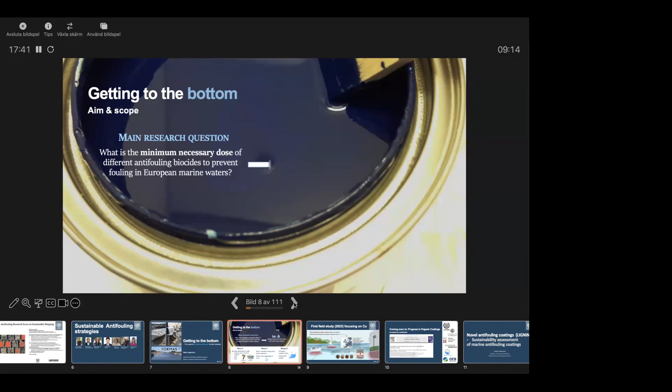I will show you some preliminary results, but her main research question is what is the minimum necessary dose of different antifouling biocides to prevent marine fouling in European waters. The results are relevant both for the shipping and the leisure boat sector.

What she's doing, and what I have also been involved in during the last decade, is detecting different biocides by using X-ray fluorescence techniques. We have a handheld X-ray instrument here at our unit, and Maria is also collaborating with others who use a benchtop instrument instead. Her biocides of interest you see here to the left.

She's running experiments both short-term and long-term, so it could be relevant both for the leisure boat sector and the shipping sector, conducted in European coastal waters. Regarding the results, the minimum effective dose of copper is 7 micrograms per square centimeter in three different locations: Sweden, Denmark, and France. That is very interesting, and she will continue similar work for the other biocides.

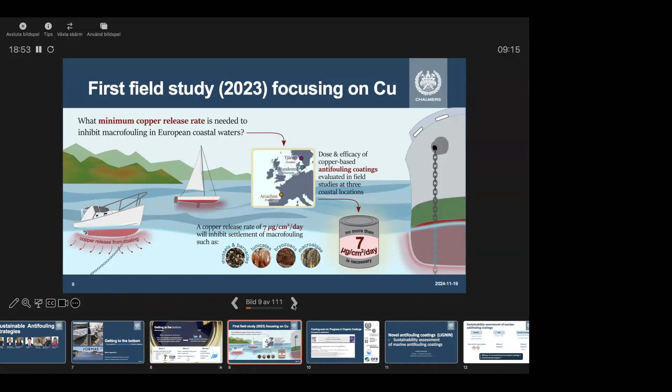This data is just about to be published. It has been accepted for publication, so look out for it in Progress in Organic Coatings if you want to learn more. Okay.

Then we have Emily, Lena, or yeah, okay. Yes. Or shall I? I am here. Yeah. You need to stand here so everybody can see.

This project, in short called Lignin, I will come back to that. Novel antifouling coatings: sustainability assessment of marine antifouling coatings is what the postdoc Emily, who joined us from France in the spring, is mainly working on. The idea is to do a sustainability assessment of marine antifouling coatings, where she compares coatings that contain biocides with FRC, silicone-based foul release coatings, and the novel, innovative coatings.

Bio-inspired coatings, hydrogel and lignin. Lignin is a residual product from the wood industry, so this is a collaboration with Luleå Technical University. The aim is to test the toxicity together with the efficacy, so they hopefully will be both efficient but non-toxic.

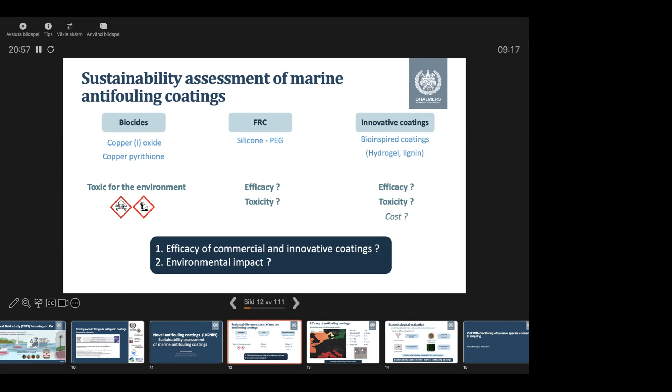I think that's it, if you don't want to add something, Erik. No. No.

She has test areas that include, besides the waters around Sweden, meaning the Baltic Sea and the Skagerrak-Kattegat area, also two stations in the Mediterranean, in Trieste, Italy, and Banyuls, France, with the aim to include different salinities. You can see it's a span from 7 to 38.

There is monthly monitoring where we have photos sent to us of the frames you can see, and we follow how the growth of fouling organisms develops on the different panels with different paints and treatments. If I recall correctly, they started in spring and will be terminated by the end of the year, so they capture the fouling season.

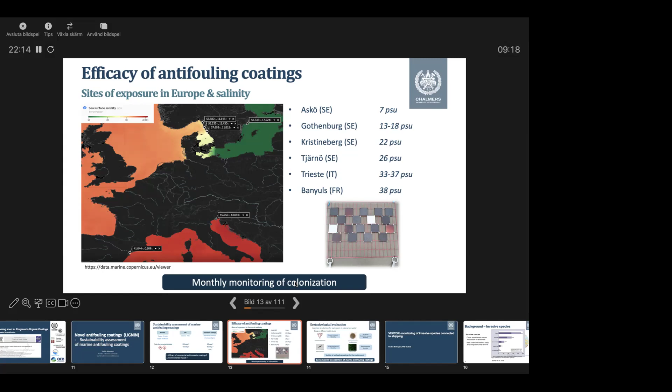Then she tests if they are toxic by producing leachate, which is water where the paint has been, and this is tested on several study organisms at different trophic levels. There are algae, red algae, which I think Jonas Gustafsson recalls. Isn't that true? You've been working with that one. And Nitocra, which is a typical test for larval species, and also larvae from the sea urchin, and bacteria.

So this will then give the results that will tell if they are toxic for the environment, and everything will be used in the sustainability assessment. So we move on to the project called VEKTOR, and I leave over to Paulina.

Yes. So I'm Paulina. I have a background in marine biology, and I'm now doing my PhD in the VEKTOR project. This is a project that we do here at Chalmers, but we also work with the Gothenburg University and the biology lab that we have here. Basically what we try to do is monitor invasive species and try to have some sort of pre-warning system in the end, and try to reduce a little bit the problem that comes from invasive species.

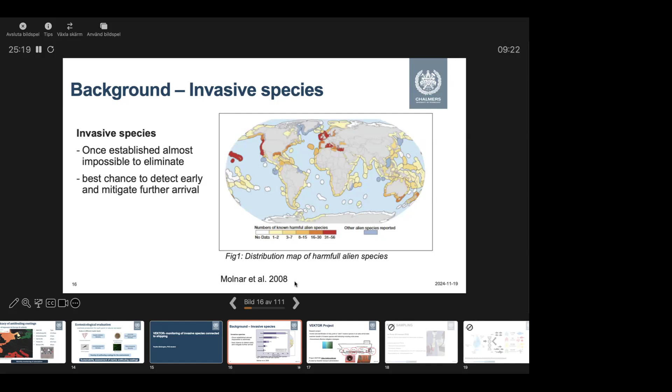And the problem with invasive species is basically if they're there once and established, it's really hard to get rid of them. If you have a few individuals, you can stop the vector of them coming in, or you can catch them and eliminate them. If there's thousands of them, it's really hard to get rid of them. And even if so, the ecosystem is altered, and it's not a given that it snaps back into its original state. So the best thing to do is catch them when they arrive, or even before they arrive.

And if we look at how they arrive, shipping is actually a big vector for arrival of invasive species, and it would be good to reduce that a little bit. So what we do is we try to identify high-risk ports with AIS data and distribution maps of invasive species. For example, if we have a jellyfish that is in the UK but not in Sweden, and we have traffic in between these places and the conditions here are favorable for the jellyfish, there is a certain risk that this jellyfish will come here. And then we monitor the ports for our model species and try to develop in the grand scope a pre-warning system.

The second thing that we do is we look at how our species are traveling. Not all species travel or attach the same on different foulings, antifouling paints, or on the same areas of the ship. For example, adult crabs are not very common in hull fouling, but we can have them in niche areas like sea chests. Another example is the sea vomit, which likes to travel on pontoon-like structures, something that's flat and towed rather slowly. So they can invade with towed jetties. And if we know things like that, it's very easy to have a very targeted and effective measure against this. So that's what we try to do.

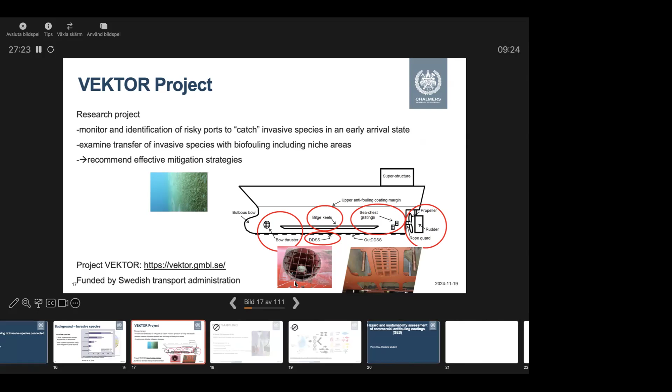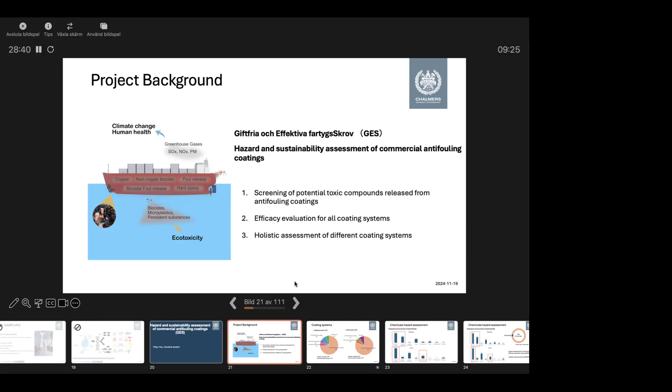The next step is to evaluate the efficacy of all the coating systems. Then, combining the results from the 2 tasks, I'm going to do a holistic assessment of different coating systems with the HullMASTER project. Currently, I'm working on the first and a little bit of the second task. And here's the result I have. For the coating systems, we have about 190 products that I went through.

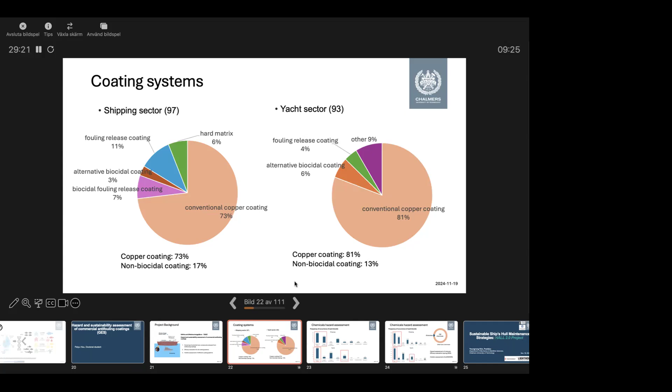For the shipping sector, we have 97 products, and 73% of them are copper coatings. And for the yacht product sector, we have 93 products, and 81% of them are copper coatings. And for the non-biocidal coatings, unfortunately, we only have 17% and 13% respectively, in both shipping and yacht sector.

I have found 158 chemicals in the coating formulations, but only 8 of them are biocides, and there are 150 left. What I'm doing right now is going through all the rest of the chemicals and doing a hazard assessment of the mixture from different types of coating. And then, as I mentioned earlier, I'm going to do efficacy evaluation, which is to field test: coat the panels and put them in the field. This is planned for next spring.

And then at the end, using the HullMASTER tool, we're going to do a holistic assessment, combining emission and efficacy of all the available coatings in the market. Thank you. That's all.

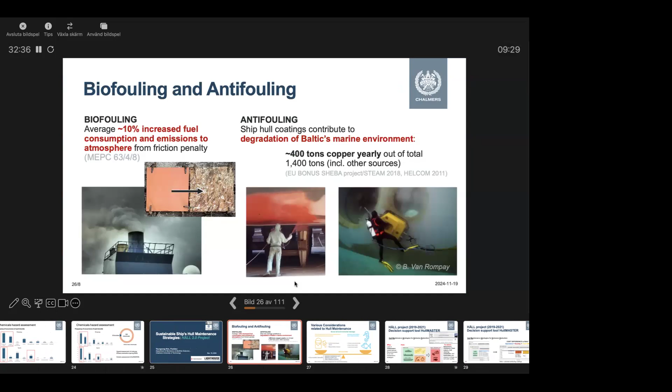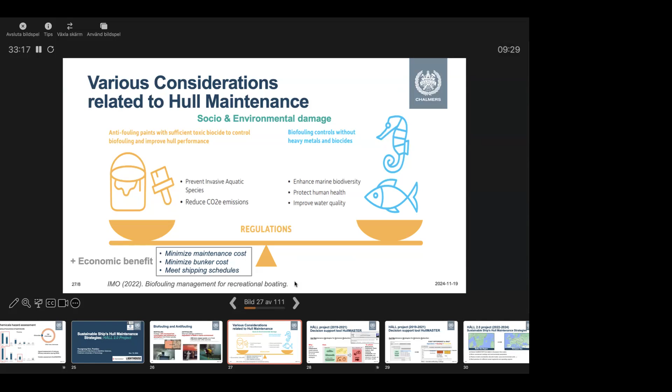To begin with, I think many of you already know much more about the background of biofouling and antifouling than I do, so I will just skip this slide. But I would like to highlight the importance of hull maintenance during ship operation. It can have a variety of socio-environmental damage impacts, such as the emission of greenhouse gas to the air, the release of biocides, heavy metals, and microplastics, and also the introduction of invasive species. So it is very important to find sustainable hull maintenance strategies that are economical and at the same time minimize the environmental damage impact.

However, finding a sustainable hull maintenance strategy is a very challenging and complex task because the cost savings and damage impact can vary significantly depending on various factors. That's why in our first project, we developed a life cycle cost assessment tool that can comprehensively calculate the impact of biofouling and the many various hull maintenance activities. I believe this tool will be of great interest to all the stakeholders, like everyone attending this seminar. And I would like to take this opportunity to thank the people who developed this tool in our first project.

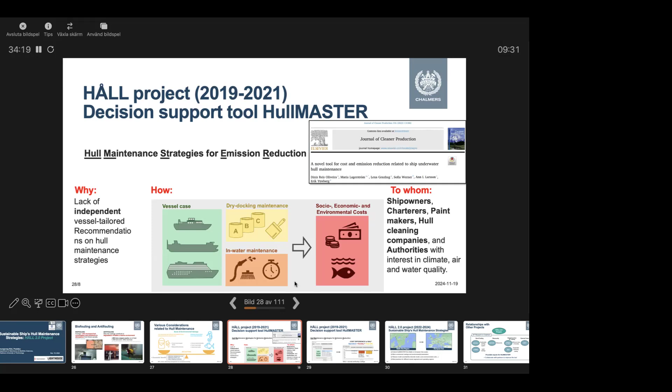Based on a large number of scientific results and inputs, HullMASTER can provide ship-specific recommendations for sustainable hull maintenance practices compared to the business as usual or baseline scenario that you have selected. Hull maintenance strategy here means the selection of the coating types, the dry docking cycle, or the type of in-water cleaning and its intensity, etc.

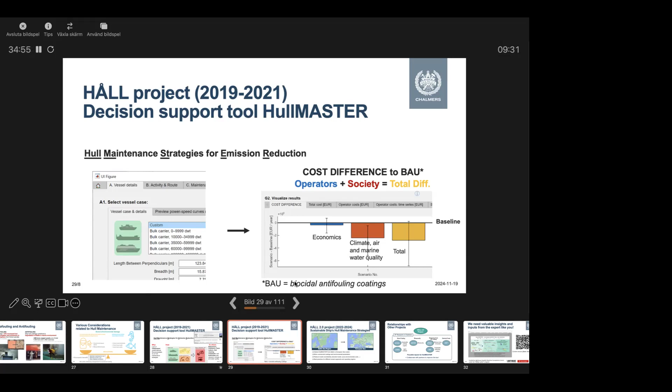As you can guess from our project name, HÅLL 2.0 is the follow-up research project, and the main aim is to expand the scope of the tool from the Baltic Sea region to the European sea scale. So we have been conducting a lot of field tests at 7 different European port terminals in collaboration with shipping companies like DFDS. We have also included more than six commercial coating products with the help of the paint company, so that we can increase the accuracy and reliability of our tool in the end.

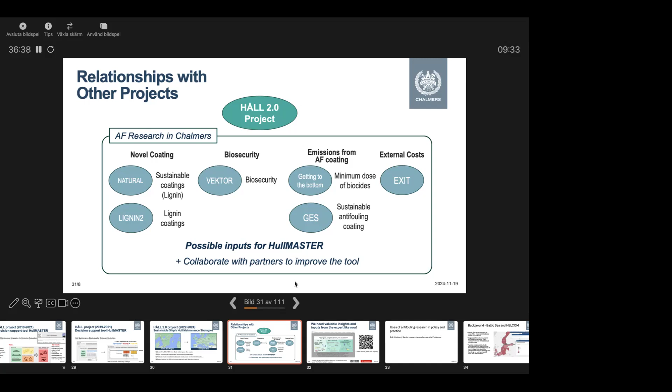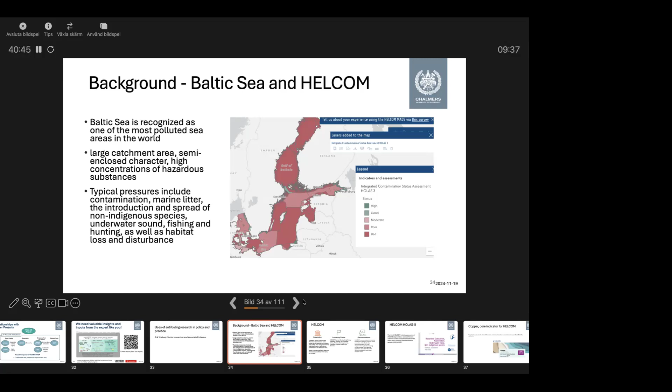The reason for that is mainly that the Baltic Sea region has a very large catchment area. We have a semi-enclosed character, meaning that the water exchange capacity is very low. It takes about 20 years until the water is exchanged. So everything that's being dumped in the Baltic Sea typically stays there. Therefore we have higher concentrations of hazardous substances compared to other sea regions. Typical pressures include contaminants, marine litter, and introduction and spread of non-indigenous species. So shipping puts potentially large pressure on this sensitive environment.

Regarding HELCOM, I'm not going to bore you too much, but just so you understand a little bit what it is. It's known as the Helsinki Commission, abbreviated HELCOM, the Baltic Marine Environment Protection Commission. It's an intergovernmental organization in the Baltic Sea region, and it contains 10 contracting parties, all the member states that border the Baltic Sea. One of the main tasks for HELCOM is to provide recommendations on how to implement measures to prevent the input of, for instance, hazardous substances.

At the moment, over 260 HELCOM recommendations have been adopted so far, but they need to be implemented in national legislation. And as I mentioned, we have the HELCOM HOLAS 3 holistic assessment that I showed you that was completely red for hazardous substances. Behind these figures are different core indicators, as they're called, and one of those is copper.

And that indicator is developed based on concentration of copper in marine sediment. So we from HullMASTER, we were a team working on this for a couple of years to develop this copper indicator to set the threshold value for what the environment can cope with in terms of copper in sediment, and then also compare that with environmental concentrations.

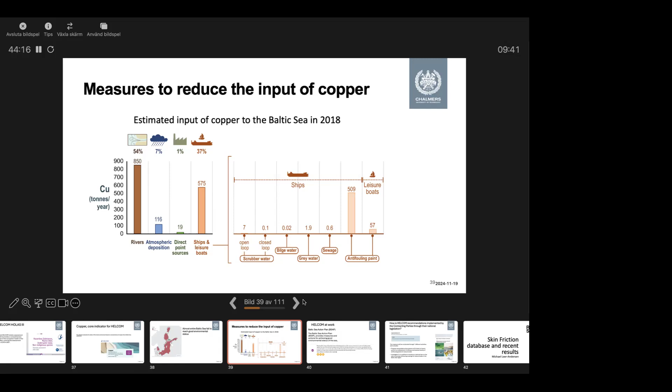So with this information, there was some discussion then at HELCOM level on, okay, can we reduce the input of copper in order to increase the environmental status? And what they came to the conclusion through something called the Baltic Sea Action Plan, which provides measures, is to minimize the release of biocides from antifouling products to the marine environment, and preferably by 2027, replace the use of biocidal antifouling products with biocide-free alternatives on structures, etc., and recreational craft.

So this was the recommendation by HELCOM, and it's now being discussed how it could be implemented in national legislation. So in Sweden, the SWAM agency has handled this together with a bunch of other national authorities. And this measure will be conducted through 7 different activities. I included 2 of those here. One is to propose new guidance documents on EU level on how to perform an assessment of efficacy and excess toxicity of antifouling coatings for the leisure boat sector.

And the second one is to investigate if it's justified to introduce an actual ban on the sale of biocidal antifouling coatings for leisure boats. So this is one way how our research has been commissioned by agencies and how they implement policies. Okay, so with that, I'm done.

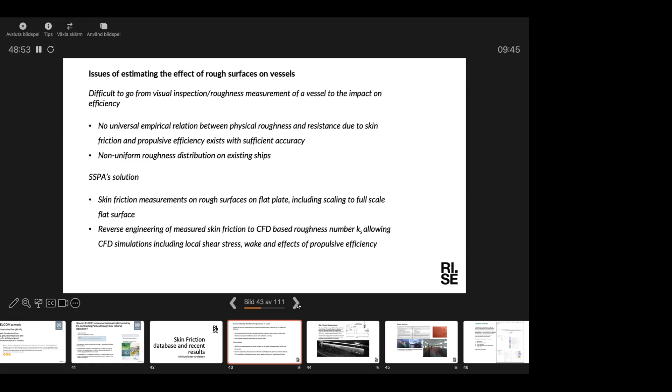So we have done a lot of measurements on a large flat plate for various rough surfaces relevant for the marine industry, and we have put all those results into a database where you can extract the result quite easily, I think, at least. We also use this database in connection with CFD for more accurate predictions of increase in hull resistance due to rough surfaces. Next slide, please.

So this is the basis of the database, or the measurement equipment. It doesn't have to be a flat plate, but it's the most accurate and the kind of measurement equipment that requires the least extrapolation to a full scale vessel. So what we use is a 7 meter long flat plate. It's 1 meter tall with a draft of 90 centimeters. So it's a surface piercing plate, as you can see in the picture.

We apply different rough surfaces on it and tow it through our towing tank in our facility in Gothenburg at various speeds between 0.5 and 5 meters per second. So we get a very high, at least for a laboratory, a very high Reynolds number. Next slide, please.

So as I said, we have tested a large variety of different rough surfaces, different aspects of rough surfaces. Obviously, we have some newly applied coatings. We don't have many of those because we don't think they're very interesting. They all kind of show between, say, 2 to 3% increase in skin friction above hydraulically smooth.

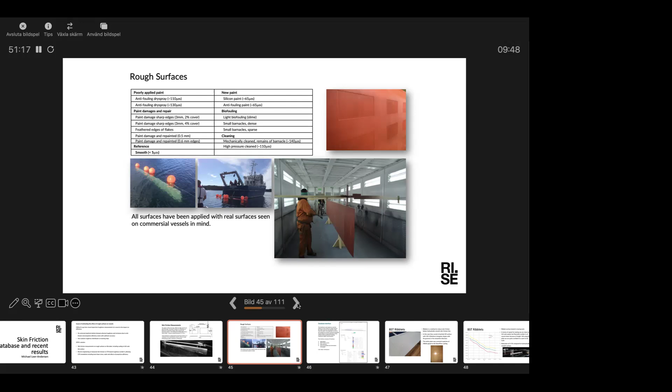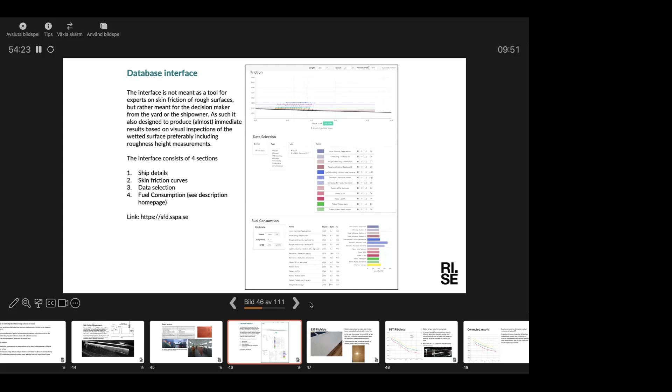We use it a lot for CFD validation and for reverse engineering using CFD. So we can do CFD computations of the flat plate, compare that to the measured results, and by doing that we can get the CFD related kS or roughness value, and then we can get a much better simulation of the flow over a real ship and its effect on wake and propulsive efficiency also. Next slide, please.

So as I said, I will talk a little bit about the skin friction database, but also some recent results from another project called New Skin. These measurements were completed just a month ago, so they haven't yet been included in the database, but they will be.

So we tested one quite interesting kind of surface. It's called riblets. If you don't know what it is, it's kind of a sawtoothed surface with about 100 micron in roughness height. So it's kind of a triangular shape, with the ridges of the triangles aligned in the flow direction. And this kind of surface has been known for quite a long time, actually, to be able to reduce the skin friction below hydraulically smooth.

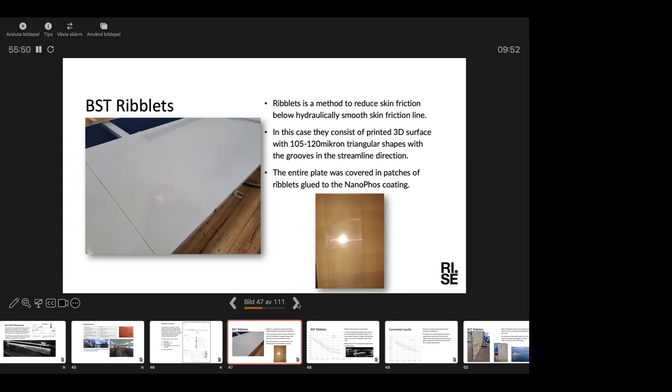And we tested this. Maybe you can see, the left picture is part of the plate. You can see it has been coated with an antifouling coating. And on top of this, patches of riblet surfaces have been glued on this coating. Next slide, please.

Yeah, this is the unfiltered results. We can skip this one actually. So this is the filtered results showing only the skin friction. And what you see here, the blue line is the hydraulically smooth reference measurement. So we polish the plate to hydraulically smooth and do a measurement. The yellow one is the antifouling coating, so it's about 3% higher than the hydraulically smooth as expected.

But then the red one is the interesting one because that's the riblet surface, and it's about 3 to 5% lower than hydraulically smooth. But a more relevant comparison is to the newly applied coating, so the yellow one, and that is 7 to 9% lower than what you would normally see on a newly built vessel. And depending on type of vessel, of course, that would equate to maybe 5 to 6% reduction in total resistance.

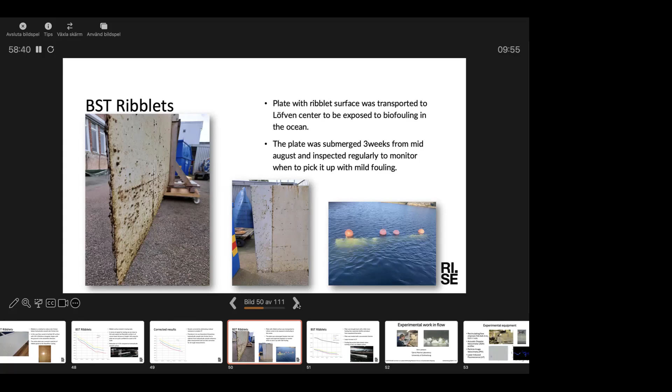There might be some indication that they don't like it too much, because perhaps you can see that the barnacles tend to mostly settle in the small gaps between each patch where there aren't any riblets. It also seems that the attachment strength, just by feel and touch, seems to be a little bit lower than on the part that doesn't have riblets. But certainly some kind of solution needs to be found for this surface to have better antifouling characteristics. I'm not quite sure how. Next slide, please.

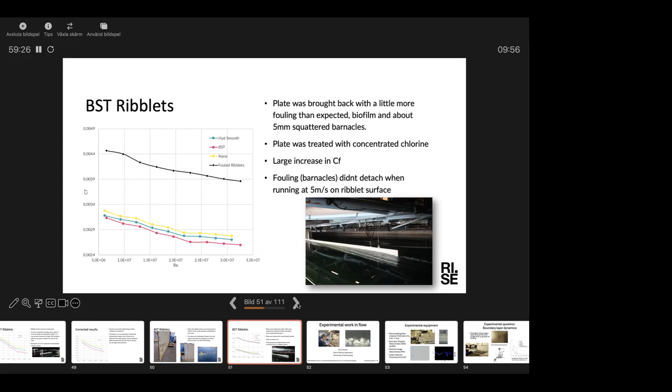Hi everyone, I'm Ann Larsson. I'm based at Tjärnö Marine Laboratory, belonging to the University of Gothenburg, outside of Strömstad. And I was doing my PhD there with Lena. So I'm into marine ecology, interested in biohydrodynamics, flow effects on marine organisms. My PhD was on barnacles and barnacle larvae, while Lena was working with algae. So I will just tell a bit of what we can do with our equipment at Tjärnö.

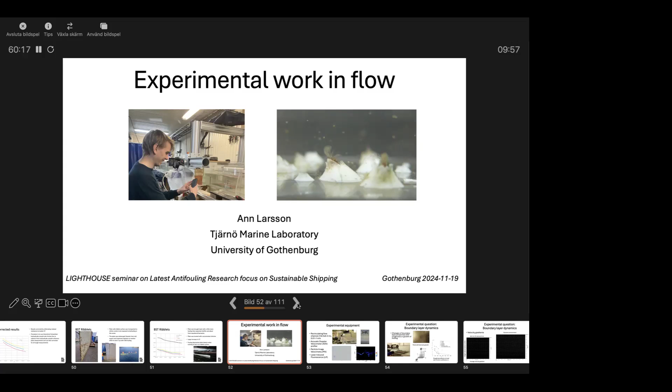Okay, so I can here. Okay.

So our experimental equipment is one recirculating flow channel, and it's 7 meters long, so we can have a fully developed boundary layer for the test section. It's 0.5 meters wide and 30 centimeters high. But we can't run it more than 1 meter per second, so it's not high speed flow. But we can control the flow very well. And we have some different equipment.

So we have an acoustic Doppler velocimeter. This is the old one. But we have a new one that also can do profiles, over a 3 centimeter stretch, high resolution, about 10 measurements for this. And it's one that is made to work in a flume, so not too much sound. Outdoor ones are much more powerful.

But then we also have this equipment with a laser and a camera that we can use for particle image velocimetry and laser-induced fluorescence. So with particle image velocimetry, you put particles in the water and you illuminate with a sheet from the laser. And then you look straight into the laser sheet with the camera, and the software is tracking the particles. And you can have very high resolution, both in time and space.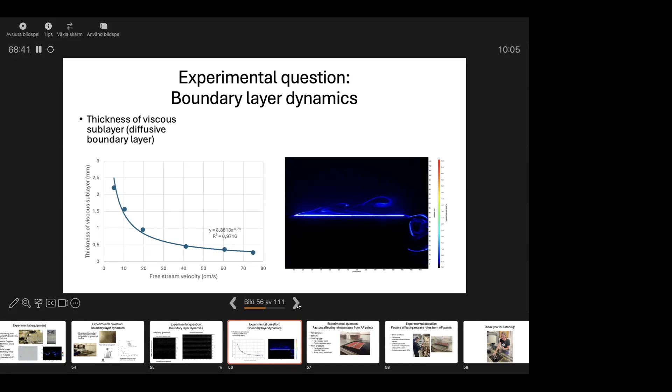Okay. So what we have also done is to look at factors affecting release rates from antifouling paints using XRF before and after. We can also chill the water to about 5 degrees. We have a cooler, so we can control the water. And the salinity is what it is when it comes from outdoors, around 30, 32. Deep water.

What's been interesting is to compare a hard copper paint and a polishing copper paint, expose them to different flows, and look at how the thickness of the diffusive boundary layer and also shear stress are affecting the release rates of biocides, and especially to compare what is important for these different things. We would like a coating that is releasing material when in harbor, but not releasing more when the ship is running, because that is just not necessary. So that is why that is interesting.

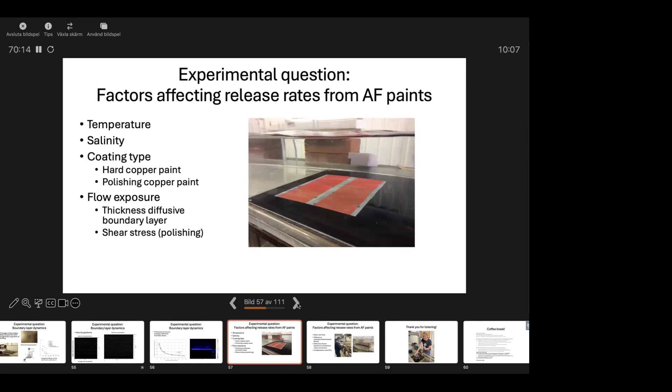Together with the Danish Technical University, we have also looked at flume exposure compared to rotary immersion, using the same coating here in the flume and then comparing to rotary immersion. But we don't have the answers yet. It's also interesting to look at the difference between upstream and downstream panels, because you can imagine that further downstream, more material is coming into the diffusive boundary layer, affecting the release.

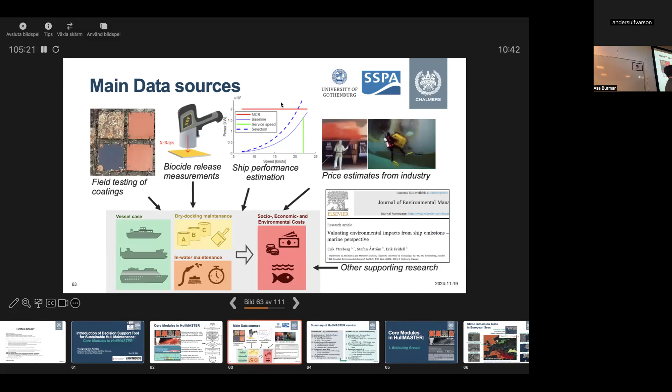So to make these core modules, of course, we are using a wide variety of inputs from scientific results. For example, antifouling efficacy test results and the X-ray measurement to estimate the biocide emissions from the antifouling coating, and the ship performance estimation and various price estimates from the industry. And of course, we are using many supporting research and scientific results.

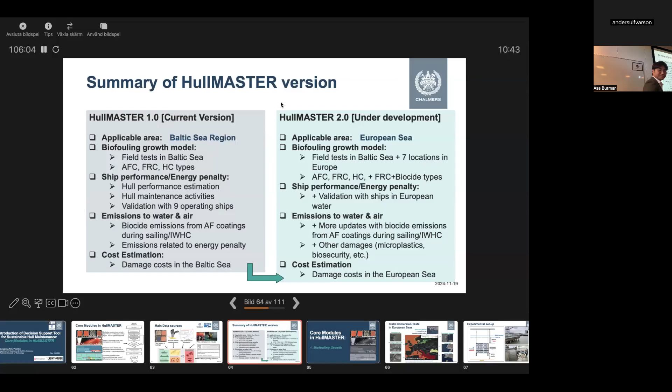This slide shows two different versions of the HullMASTER. I would like to highlight that the current version, which is available online on our website, is our earlier version, which is focused on the Baltic region. And now we are actively working on the next version for the European sea scale. In the next version, there will be more experimental data, more options, and more scientific results included. So from now on, I will talk more in detail about each module.

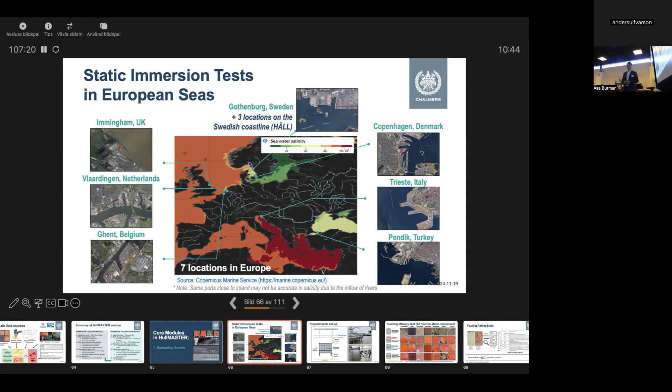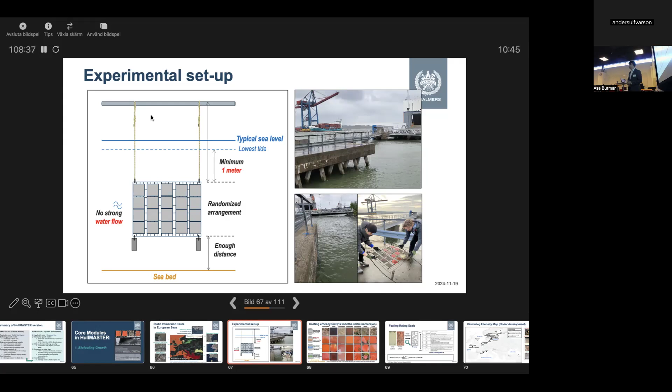And then over the 12 months of static immersion, as I mentioned, we monitored the panel condition every month, which means now we have, I think, more than 2,500 in total of this kind of panel. And we have monitored each panel.

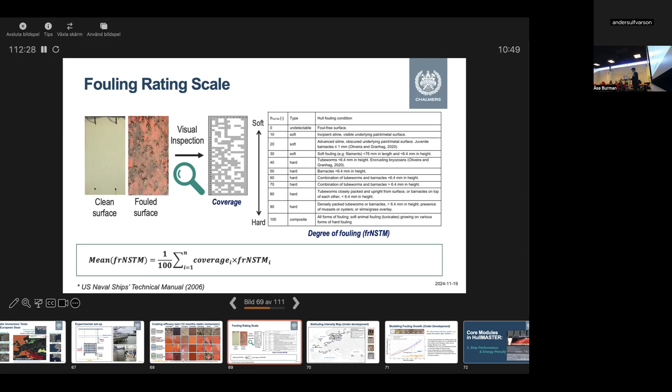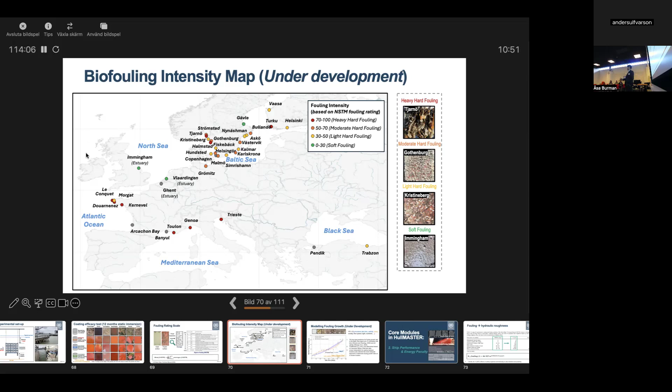Conversely, if you look at the Baltic Sea, as Lena and Eric mentioned earlier, they have quite different salinity gradients, and you can see many yellow, orange, and green colors, which means relatively less intense than the other regions. So from this, based on our findings, we got to know the main factors affecting fouling intensity in Europe, and how to develop our fouling growth model. First, in our first project, we used salinity as our main factor, and then the cumulative idle time in the formula.

If you look at this diagram, it shows the fouling rating over the idle time. This gray marker represents our field test result, which matches the pictures above, right? As I mentioned, we initially used cumulative idle time and salinity as our main factors to model fouling growth, and this is how we developed it in our first project. Of course, there are many other environmental parameters affecting fouling growth, like pH, flow speed, light condition, nutrient level, etc. But it was not easy to cover everything for this region. What we wanted was a decent prediction based on certain parameters, so that's why we used cumulative idle time and salinity for the first prediction.

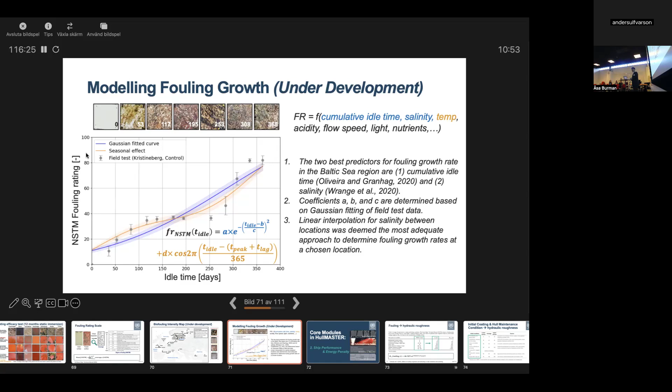Then we will move on to the second module, ship performance and energy penalty. To estimate the changes in the ship's hydrodynamic performance due to biofouling and hull maintenance activities, we need to convert our fouling rating scale to the hydraulic roughness scale, referred to as KS in microns, because fouling condition just tells whether we have severe fouling or soft fouling, that's all. What we want to know in the end is the frictional drag increase of the ship, so we need to convert our scale to the hydraulic roughness scale.

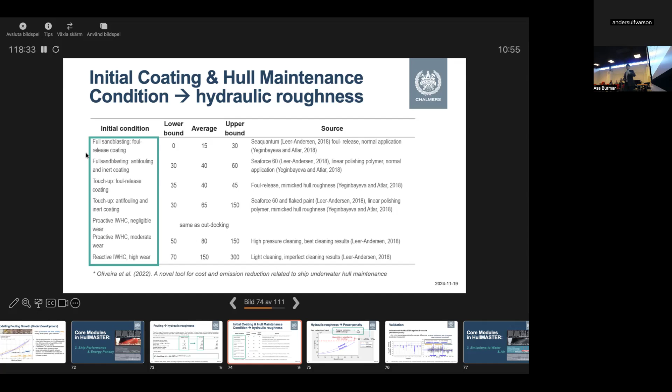And then, there has already been some discussion about Granville similarity scaling, etc. But anyway, in this tool, we are using the kS value, which is hull roughness, and in the end we want to know the frictional drag of the ship at a certain speed. So we are using Granville similarity law scaling to estimate, in the end, the propulsion power penalty of our ship.

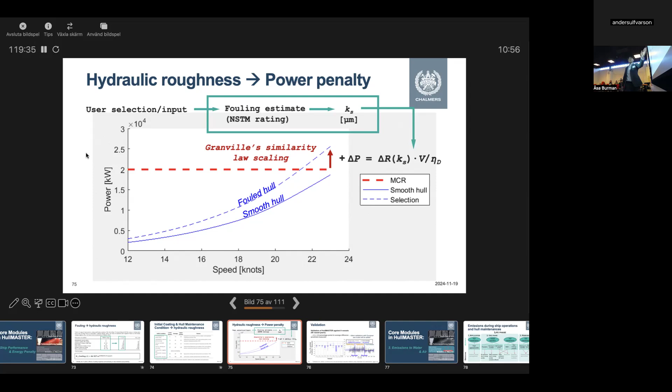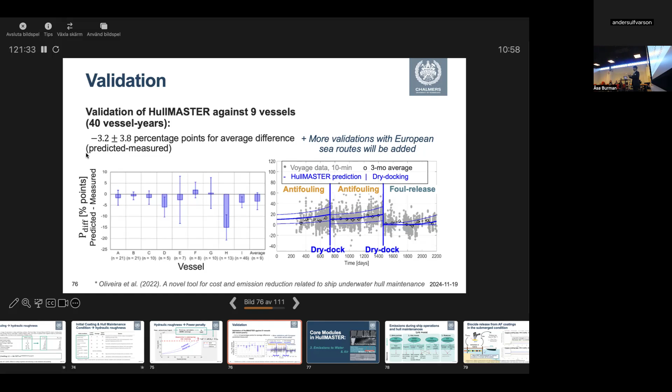And in addition to that, we are trying to add more validation cases of ships sailing in European waters based on our current project. And then the third module is about the emissions to water and air. I think most of you are interested in this part, not the first and second part maybe.

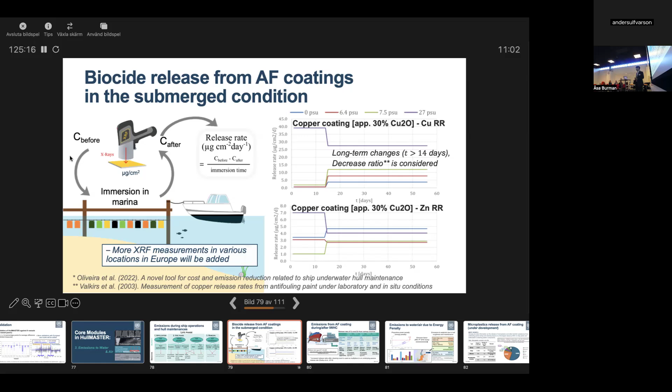And also, as Anne mentioned before, we are still considering including the ship's biocide release during the dynamic conditions, because our data set is based on the static immersion test. So probably we can consider more effects during the ship's dynamic condition. And not only the ship's sailing, but also during the ship's maintenance stage, like during in-water cleaning.

As you know, there's a paint particle release, which will also contribute the copper and zinc release from the antifouling coating. And we have modeled our release rate of copper and zinc based on cleaning intensity, like low intensity, medium intensity, and high intensity. These inputs are from previously published papers.

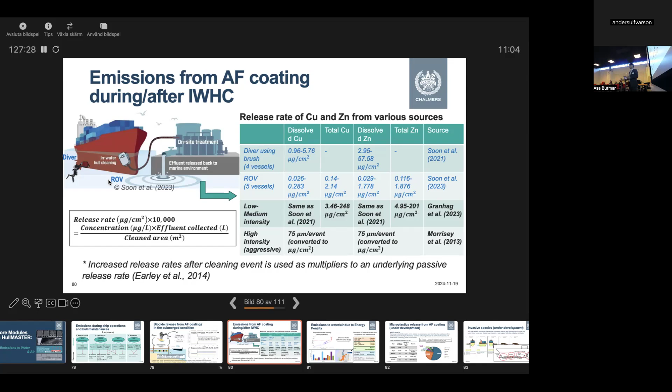Earlier I mentioned that in the ship performance module, we estimate the propulsion power penalty due to biofouling and hull maintenance activities like this. And to estimate the emissions to water and air due to hull roughness and maintenance, we are considering the emission factor from the IMO greenhouse gas study, so that we can estimate various types of emissions which affect the climate change impact, human health impact, marine eutrophication, and marine ecotoxicity, etc. So far, we haven't included acidification, but that is also something to be upgraded someday.

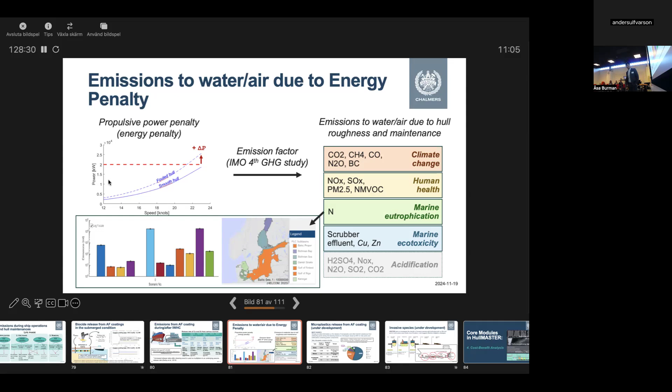And then there's microplastic. Moving on to the recent issue of MEPC 80, there was a discussion about microplastics release from antifouling coating. There were some inputs from Norway, DNV, and they have shown a very simple, approximate way to estimate microplastic release. If you look at the right side, this is the equation to estimate microplastic release rate, considering the wetted surface area and dry film thickness provided by the paint manufacturer, the microplastic content in dry coating, and depletion rate per year. So that's how it is.

And of course, we need more inputs and more sophisticated data or methods, but we are planning to include microplastic release based on this equation during the ship's sailing and during the ship's maintenance phase.

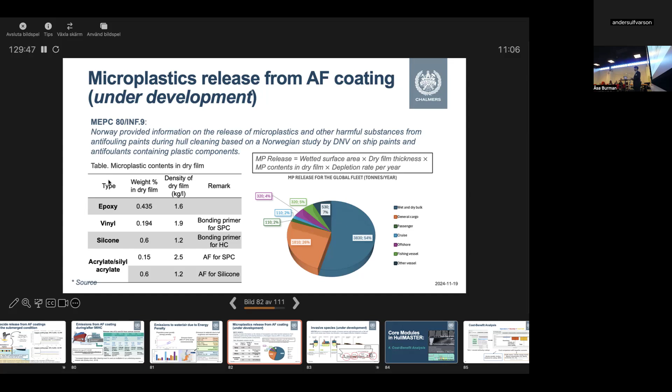And one of the challenges nowadays is the risk of invasive species. Marine species can be attached to the hull and the niche areas, so they can be spread into different regions when the ship is operating. Additionally, when the ship undergoes hull maintenance, like in-water hull cleaning at the port or dry dock, marine species can be detached into the local waters, so there will be the risk of invasive species. That has been discussed a lot nowadays, right?

And of course, as you can see, I have written that it's under development, which means we don't have this yet, but we are expecting to include the biofouling tracking and risk assessment result from the vector project, which Lena and Pauline are working on.

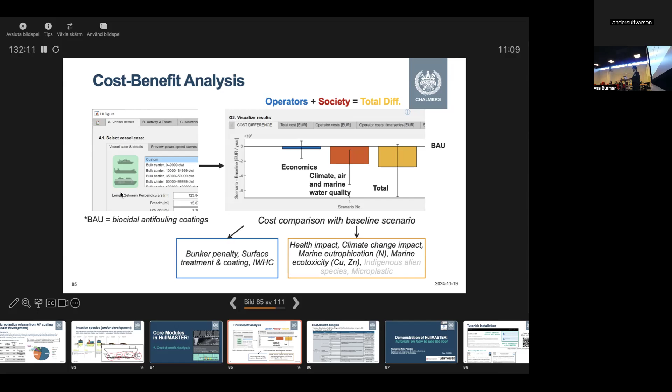And it is important to remember that this kind of cost-benefit analysis due to the biofouling and hull maintenance is compared to the hydraulically smooth hull, which means HullMASTER is designed for analyzing the relative cost difference across the different hull maintenance scenarios, rather than providing the absolute cost. So maybe you don't know what the absolute cost of the biofouling and hull maintenance is, because their reference points are all different. But based on this, you can identify which one is better or how much you can save compared to the business as usual scenario. So that's how it works in cost-benefit analysis.

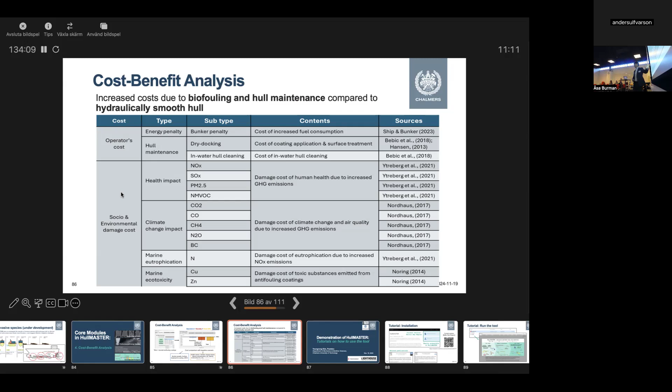And this table shows more detail about our cost contents and the relevant sources. I think we have made an effort to include the data sets or costs from the industry. But it is important to note that this cost-benefit analysis can be different based on how you define the cost or where you get the sources from. Because most of the data set is from the industry, sometimes there are not that many samples, so it will increase the uncertainties. Or sometimes there's a large variation depending on the company or the sources. So it is really important to get more information and data sets from the industry, so that we can estimate more accurate results when it comes to the cost-benefit analysis.

So I think I have covered our core modules briefly, but I don't think it was that brief. But anyway. Excellent, Jaron. Do you want a 1 minute break? I can. If there are any questions so far, yeah.

Otherwise, I have a competition ongoing here, and only you in the room can attend. The first one that gives the correct answer to what the MASTER in HullMASTER stands for will get a nice prize that I have made from the leftovers in the coffee. Who would like to try? It's not the end of the world if you don't say it correctly. I can give you the first word maybe. Maintenance. No. They were underlined. Okay, maintenance strategies. Environmental. It could be environmental, but it's actually emission. Oh, reduction. I think Andrew, you spelled it out. Okay, so then we leave the floor to Jan.

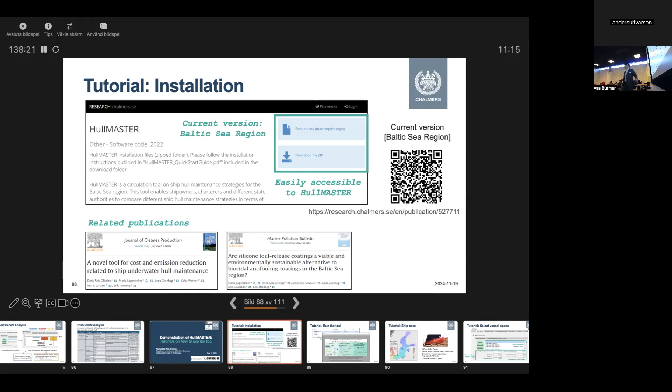All right, then we can move to the tutorial on how to use HullMASTER. I think this tool is very intuitive, so you can simply follow along with my explanation. HullMASTER is open to the public on our HullMASTER website. If you search HullMASTER or HullMASTER Antifouling Research Group, you can find this website easily. If you access this site, you can download HullMASTER, and you can also find the instructions and the relevant papers. Once you download the program and open the file, there are several files included. Once you double-click the HullMASTER icon, you can find this user interface.

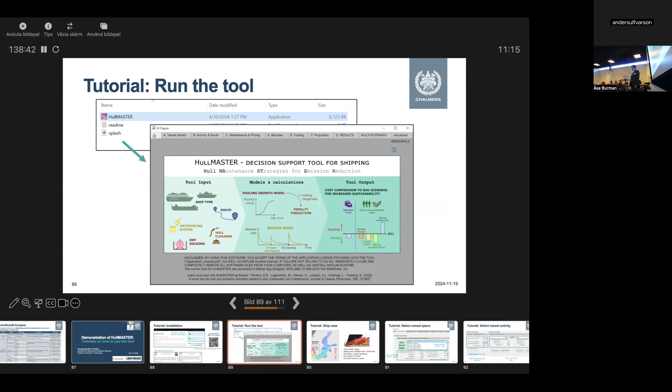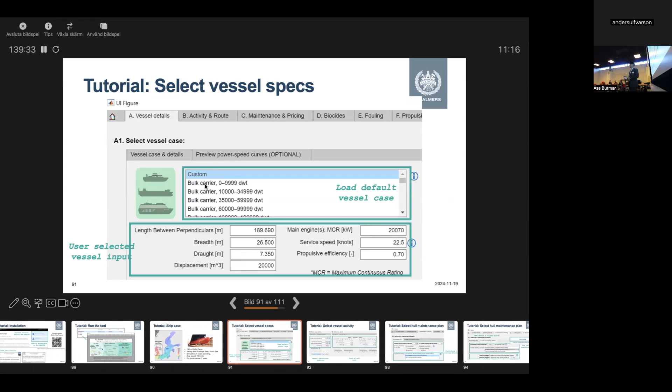Here I will show you an example using a 190-meter Ro-Ro vessel sailing in the Kattegat and North Sea. But this is just for the tutorial, only one ship case. If you want to run the simulation, first you have to specify or select your ship information. You need inputs like the ship's length, draft, displacement, engine specs, propulsion, and importantly, you have to specify your fuel type. If you don't have this information, there's another option, load, where you can load the default vessel case according to the ship size and ship type.

And then you also have to define your vessel's operational profile and environmental conditions of the ports that the ship will enter. So this information includes the ship's average sailing speed between the ports, how much time the ship will spend at the port, and also the seawater temperature and the seawater salinity of the port. This information will be very important to estimate the biofouling growth on your hull when the ship is berthing at the port.

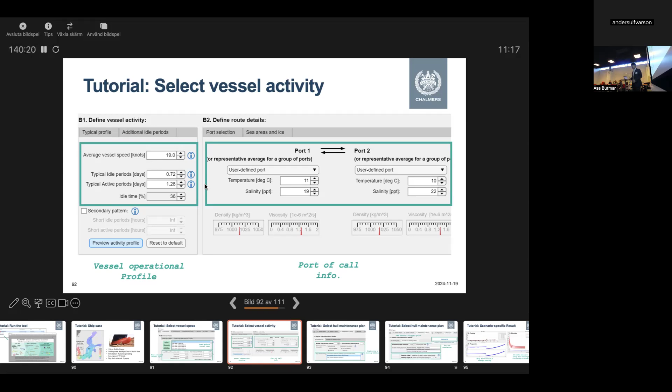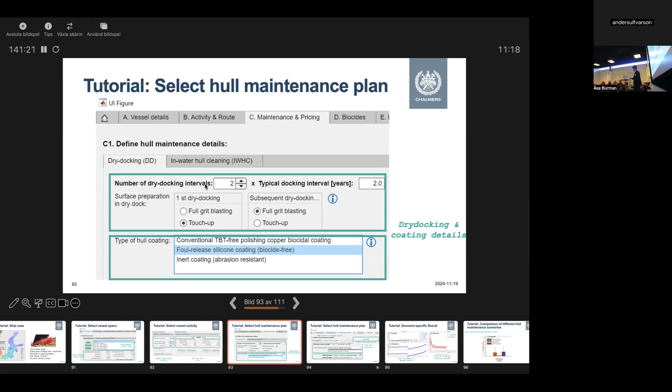And then if you are planning to implement in-water hull cleaning during the ship's operation in your scenario, you can also select the frequency of your in-water hull cleaning and type of the cleaning approach. And here you can also specify the cleaning trigger option, which means if the ship surface reaches a certain level of fouling, then the cleaning trigger will be activated automatically based on your setting. For example, if the power penalty of the ship reaches 50%, then if you take this option, the cleaning will be automatically applied in this tool.

Then, once you have input everything related to your ship operation profile, hull maintenance scenario, everything, you go to the G tab and then press the calculate button to run the simulation.

Well, I think it will not take longer than a few seconds to a few minutes to run the simulation. But depending on your hull maintenance scenario, for example, if you are running 25 or 30 years of operation, and if you have selected many different hull maintenance events, like maybe in-water cleaning 3 times per year and everything, then it will probably take, I don't know, 15, 20 minutes or more than that. So it really depends on your setup. But typically it will not take much time.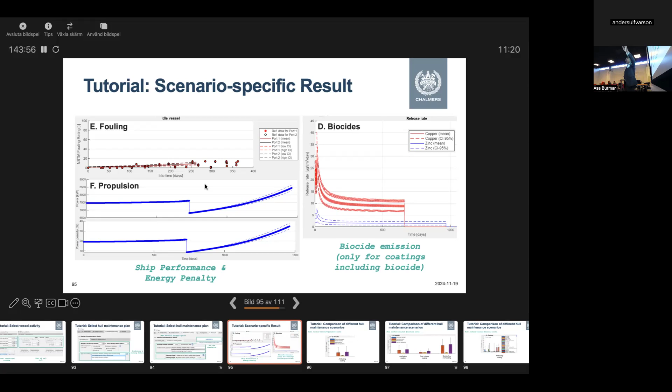And once you complete the simulation, you will find this useful, valuable result. So if you go to the E tab, you can find the biofouling growth on your hull, depending on the port. And also you can find the propulsion penalty of the ship over time, depending on hull maintenance events. And if you go to tab D, then you will see the biocide emission trend according to the ship's operation time. So if you have selected your coating type as copper-based antifouling coating, then you will find this trend over time.

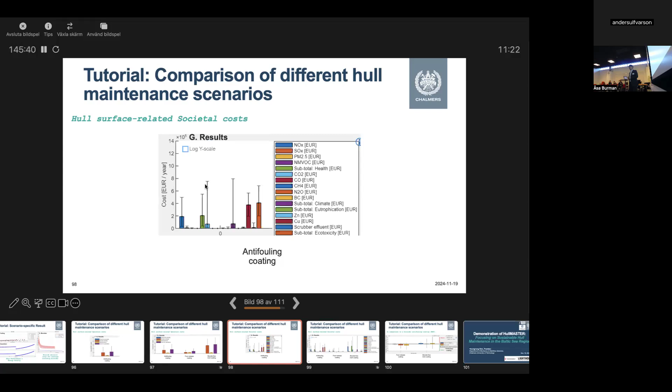And then there's also a societal cost, which means the environmental damage part. And similarly, you can also compare many categories of the environmental damage. As I mentioned earlier, there will be human health impact, climate change, marine ecotoxicity, marine eutrophication, etc.

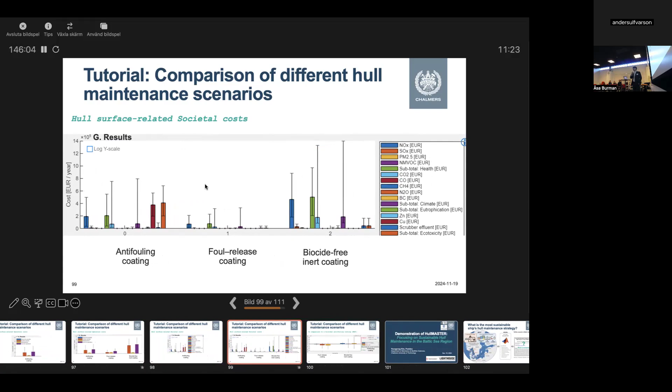And then finally, you will see this comparison. As I mentioned, HullMASTER is designed for comparing the different scenarios. So you have to have your business as usual scenario as the baseline. That will be your reference point. And then you will see how much you will save or how much you will lose depending on the scenarios, depending on the operator's cost, the social environmental cost, or the total cost.

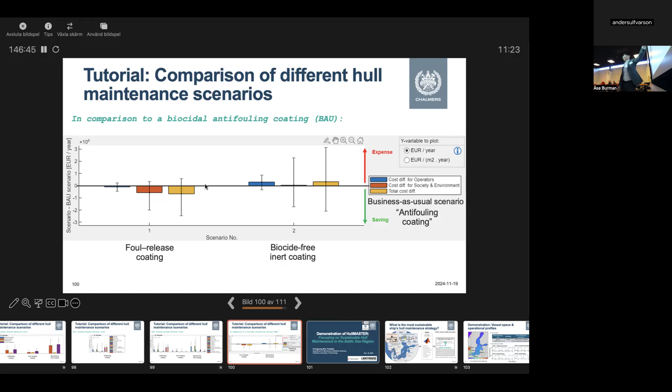So, well, that is all for the tutorial. I hope it was easy to follow. Of course, there is something more to say, but I think it is enough. If you have any questions regarding how to use HullMASTER, or if you want to contribute to tool development, feel free to reach out to me or to our members.

So can I continue? Okay. So it will be the last presentation for today's seminar.

So far we have looked at using HullMASTER only for the one ship case in the tutorial. If you want to know how a specific maintenance strategy of your vessel affects the economy and environment, this is how you evaluate it using HullMASTER. But moving one step ahead, if you want to answer the question, what is the most sustainable ship maintenance strategy for the specific vessel case? That is what we want to know, right?

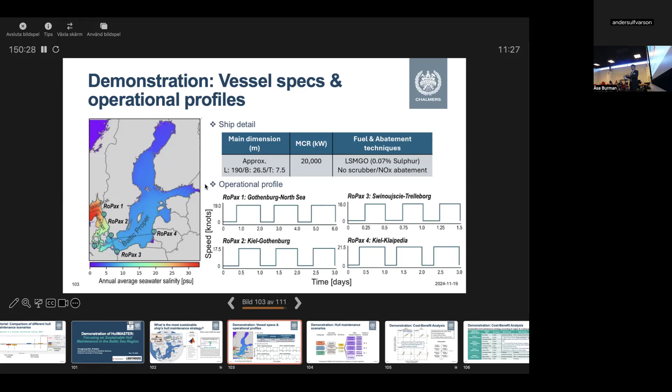We used the ship's actual operational profile, as you can see here, and the actual operational routes. It covers the Skagerrak, Kattegat, the Danish Straits, and the Baltic proper region. Of course it doesn't include everything, but we try to cover the Baltic Sea region. And as I mentioned, we covered as many feasible strategies as we can, so a total of 93 different scenarios were included.

In more detail, there are 3 coating types. We considered 3 different dry docking intervals, considering that this ship is a RoPax. We covered different in-water hull cleaning intensities and frequencies, from zero to once, twice, three times per year, etc. For the foul release coating, we didn't include in-water hull cleaning according to the paint manufacturer's feedback. So for the biocidal copper coating and inert abrasion resistant coatings, there are 45 scenarios each, and for the foul release coating only 3 scenarios. A total of 93 scenarios that we implemented.

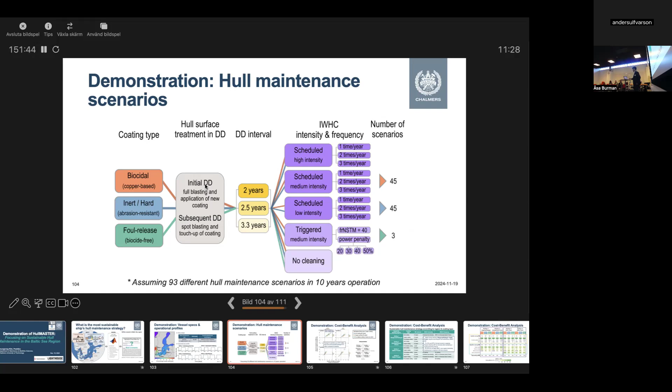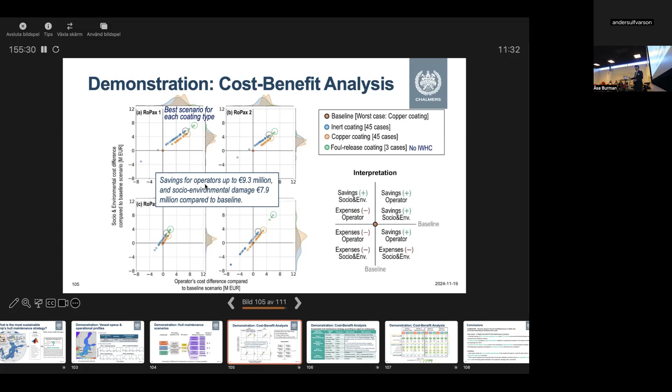Of course, I think nowadays the shipping companies are maybe not at this baseline, but maybe around this, so the difference will not be that much. However, we have to find more sustainable and more economic benefit, of course, and less environmental damage. So that is why we developed this kind of decision support tool.

So, for example, Skagerrak and Kattegat have higher fouling intensity than the Baltic proper region. So if the ship is sailing in the Skagerrak and Kattegat region, then you need more frequent hull maintenance compared to the ships in the Baltic proper region. And I think the same will apply for the entire European region. As I already showed, each region has different fouling intensity, which means they will have different solutions when it comes to the operator's cost and when it comes to the society and the environment.

And then for the harder coatings and antifouling coatings, the best scenario is applying frequent cleaning with a low intensity, so that we don't create more paint particles and biocide emission, while maintaining a regular dry docking recovery. And for the foul release coating, since we didn't apply any in-water hull cleaning scenario, more regular dry docking or more regular maintenance is required in the best scenario.

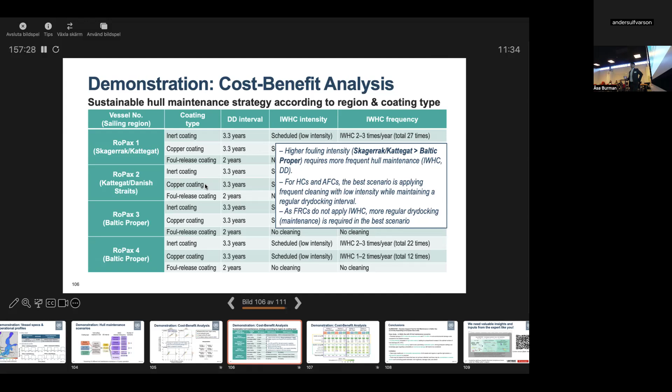And if you look at the social and environmental saving, among the analyzed coating types, the foul release coating has the largest saving. And I think that is quite obvious based on our tool and the assumptions in our tool. That is because the foul release coating can have effective antifouling performance, so that it can reduce the emissions caused by the energy penalty, which will reduce the human health impact and climate change impact, and at the same time minimize the release of the biocide so that it can reduce the marine ecotoxicity damage.

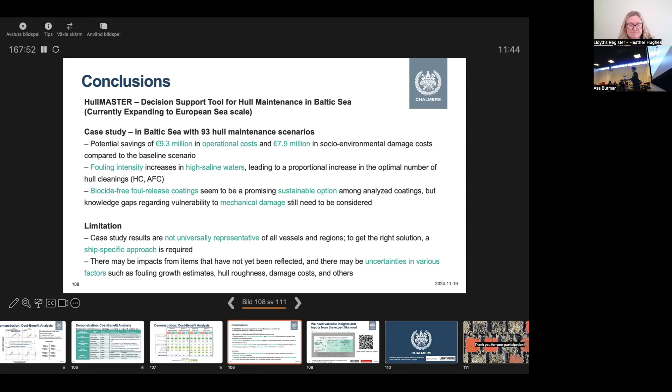Maybe we have questions. Yeah, you can just go ahead with the questions we have received. I will read it out here. It's regarding who has committed to using HullMASTER, who sets the requirements that the shipping companies in the Baltic Sea should use this tool.

I will say that it's of course based on so far our partners in the research projects, how we have collected the first data to be able to illustrate all this. But then it's open and freely available, and we can, of course, assist in that. So it's not that anyone has made a commitment in that sense, other than from their interest in getting this data.

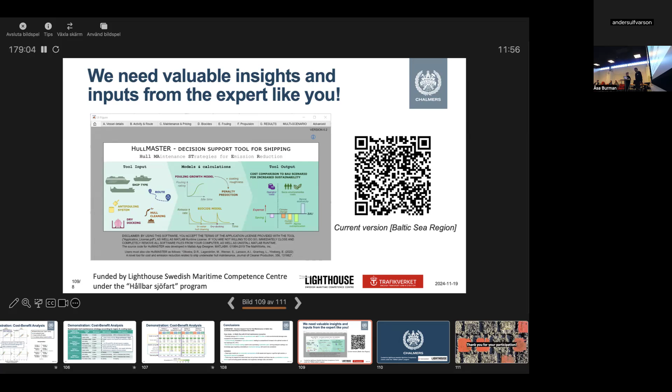We still have some months left. The final report for Hull 2 will be delivered in the spring. Looking at you because I don't have the dates, but it's coming soon. So there will also be a way to read about this besides the papers that we have referred to. And the first report is available on our website. Yes, true. So if you're interested. Yeah, that is good.